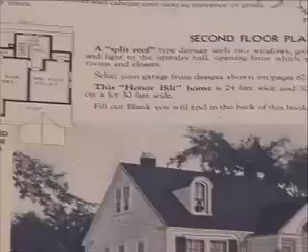I've been a freelance writer for several years, and I was asked to write about the Sears homes in Carlinville, Illinois. Carlinville has 156 Sears homes in a 12-block area. I went out there to research and write this one article, and I fell in love with the houses. They were so cute, they were well made, they were still standing after so many years.

They were built in 1919. From that point, I decided I wanted to learn more about the topic, and I went looking for a book on Sears homes. I found that there was no book on Sears homes, so I decided perhaps it was time to write a book.

Between 1908 and 1940, Sears offered kit homes in their general merchandise catalogs, and the houses ranged in price from $500 to $5,000. It was a complete kit—it came with 30,000 pieces of house, together with a 75-page instruction book.

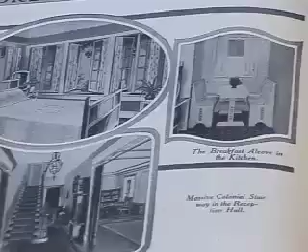Sears started selling these kit homes in 1908, but they didn't really take off until World War I. After the war and the soldiers came back, there was a tremendous housing shortage. In fact, housing analysts estimated 1 to 2 million housing units were needed immediately. That's when the sale of kit homes really skyrocketed, so it's pretty unusual to find a Sears kit home from before World War I.

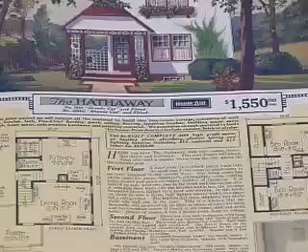One of Sears' ads, on the back of their 1918 Sears Modern Homes catalog, said, "Hang your saw on a nail all day." The average builder back then—the average do-it-yourself homeowner—would have been using a handsaw. He would not have had the power tools we have today.

So the fact that the lumber came pre-cut was a really impressive part of the deal and saved a lot in labor and time. Sears had their own staff of architects who would sit around and sketch out designs and draw plans for their kit homes.

They looked at what was popular back in the day—the popular housing designs of that era—and they'd tell the architects, build us a few of these. So yes, it was all male architects.

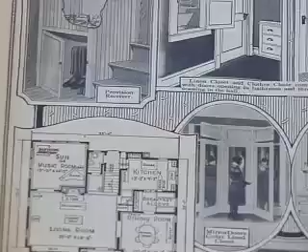That's the reason Sears got into selling kit homes—it was a way to sell more of the stuff in his 100,000 item, 1,200 page, 4-pound catalog. And it was very successful.

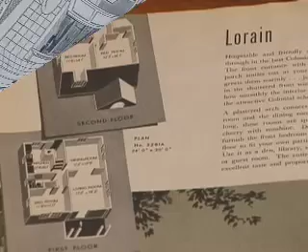Next, a design consultant with an extensive knowledge of this period in history talked about a design style that will bring 1935 into today. Back in the 20s and 30s, a lot of times you walked right into a room, especially a Sears Craftsman style room.

These homes were meant for very cozy, practical living, and that's why the rooms are small. If we had furniture in here, we would feel so comfortable because we don't have to shout to each other—right away, a conversation will be started.

So this color has to—these rooms really should be almost treated the same, so that it doesn't look like an afterthought. You have to make sure when you do it, it doesn't look like you ran out of paint, that every wall was done and then, oh, we forgot—so make sure that color somehow gets put in here. Paper like this, or a faux finish, would be wonderful inside.

A lot of times you'll see Frank Lloyd Wright's influence on these homes—the geometrics. They thought it was modern, but it was modern because of the amenities. What we call modern today is two different moderns, contemporary modern. Today we would call this very traditional. And tradition just doesn't go out of style.

After you picked out the house you liked out of the Sears Modern Homes catalog, you would send a $1 good faith deposit to Sears Roebuck, and by return mail they would ship you an entire set of blueprints and the list of building materials to come with your Sears home. You took a look at the blueprints, and if you liked them and the inventory promised, you would send in the balance of your money. Sears would credit that $1 deposit toward your final purchase price, and Sears would ship you, typically by rail, an entire kit house.

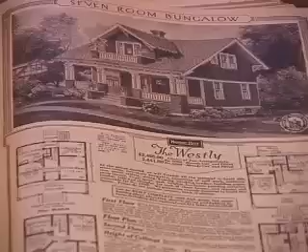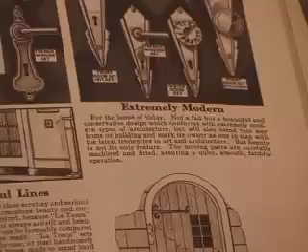The kit would fill about one boxcar. Sometimes the bigger homes required two boxcars. It was packed in an amazing manner—I've seen a photo of one of these boxcars, and I don't think there was room left over for a single nail. The kit included about 750 pounds of nails, 27 gallons of paint and varnish, 10 pounds of wood putty, 460 pounds of window weights, 72 coat hooks, and a doorbell, in addition to a lot of lumber and other parts.

But it was a complete kit—it had everything you needed to build a home. Then you would get a call from the station agent that your boxcar filled with Sears house parts had arrived. You would go down to the train station and they would put your boxcar on a siding. Typically you had 24, maybe 48 hours to unload the boxcar before incurring a penalty. And because the mode of transportation back then was a horse and wagon, or maybe a Model T or a simple truck, people often made many trips back and forth from the boxcar to their building site.

That's why today most Sears homes will be found within 1 to 2 miles of old train tracks, because you typically would make 10, 20, even 30 trips back and forth from the boxcar to your site.

The boxcar would arrive with a seal on it. Once you broke that seal, it was your responsibility to do an inventory of the pieces and parts. If you did find a broken or defective part among your 30,000 pieces of house, you simply contacted Sears and they would send you a new part. You didn't have to return the part or supply any evidence that it truly was damaged—they were very good about that.

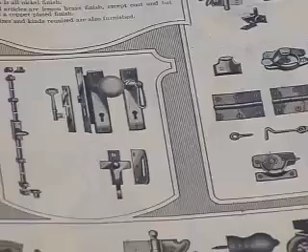What's even more amazing is that of the many people I've interviewed who actually built a Sears kit home, very few ever found a missing part. Can you imagine inventorying 30,000 pieces of house and not missing anything? Or shipping it 1,000 miles or more and not having anything break?

You'll never find a straight ceiling on the top floor unless it's an addition. The purpose is to restore this house to its original condition in order to keep its historical value, not change the structure.

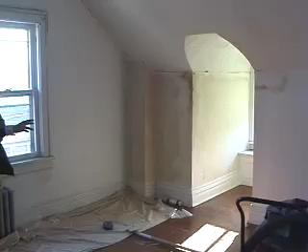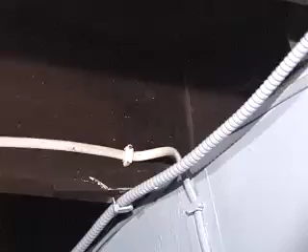Probably one of the easier ways to find out if you have a Sears home is to go into the basement or crawl space and look at the floor joists. There's going to be a stamp, typically A, B, C, or D, followed by a 3-digit number, such as C377. That stamp, together with the 75-page instruction book, told you how all those pieces and parts went together. Many years later, that's a wonderful way of authenticating that you do indeed have a Sears kit home—it will have a letter and a 3-digit number.

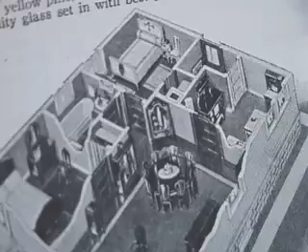Sears offered 370 different designs of their kit homes. Some people have this notion that a Sears kit home has a particular look, but they were patterned after the popular houses of the day. So you can't just look at a house and say it's a Sears home because it's boxy and simple, since they look like all the popular houses of that era. It's kind of difficult to identify a Sears home.

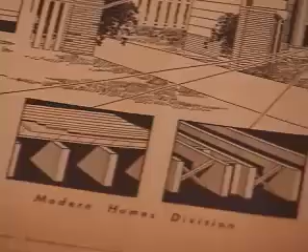Probably the best way is the stamp in the basement, looking for marked lumber. But not all Sears homes have marked lumber. About 1 out of 3 Sears homes won't have any marks. You'll find that stamp in two places: one is the butt end of the lumber, which you won't see in a completed house, and the other is 2 to 6 inches from the end, on the tall face. In other words, on a 2x6, it'll be on the 6-inch side.

The molding outlines in the room with the blocked corners, that's really not typical of a Sears home. I've not seen that in other Sears homes. It was just a little detail that would be very time-consuming to create, and kit homes were simple. Most kit homes had an essentially simple design because about 50% of the time, the home buyer himself would build the house on his nights and weekends. So the detailing in this room is not really typical of what I've seen in other Sears homes.

The archways could have been a matter of independent taste. If somebody retained a plasterer and asked him to design a specific archway, that wouldn't be difficult to do. The plaster was not included with the kit — you would contract for it privately or obtain it at your local hardware store, mainly because of the weight and regional differences in technique and temperature. So you can't really say, ah, it's a Sears archway.

Some of the woodwork, though, you can identify, specifically that block. Sears would put a block there so you wouldn't have compound angles where the different joints come together. If you just stick a wooden block there, you don't have to do a fancy miter cut. If you really look at it for a minute, it's completely out of place — the block is higher than the molding — but it was a way to solve the problem of a homeowner putting together their own kit home with no carpenter experience.

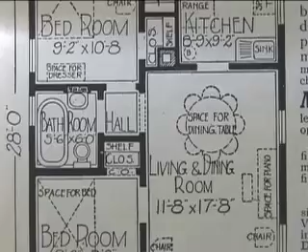At a lecture I gave in Champaign, Illinois, a woman in her 90s came to one of my lectures in a wheelchair, and clutched in her arm she had the original blueprints from the house she and her husband had built in 1929. She was holding those blueprints like one would cradle a precious child, and very carefully she unfolded them and showed me with great pride this house.

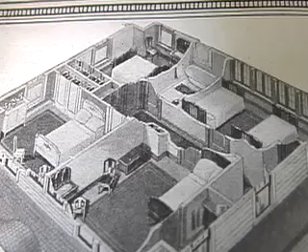In her family, she had made the decision, showed it to her husband, and said, 'This is the house I want to build.' I think that was probably fairly reflective of the era—the home buying decision was in large part left to the wife, but the husband perhaps had the ultimate say.

One of my favorite parts of that story is she also brought the original catalog where she and her husband had selected the house, out of this decades-old catalog. Where the price was supposed to be, there was a hole. She said, 'We didn't want anyone to know what we paid for our home, so we tore the price out of the catalog so nobody would see it.'

People would hang on to that stuff and stow it in the knee walls. I met a woman in Alton, Illinois who found the blueprints way in the eaves of her Sears home—that was a surprise. That was actually a 1910, 1912 Sears home, one of those rare ones I mentioned. She found a complete set of blueprints rolled up in the attic corner, where nobody had been for decades and decades. That's why I think you have a shot at finding something wonderful.

Yeah, I feel nothing, hear nothing, suggesting there was ever a door here. But this is an ideal spot for a door because you won't see it coming in, and you'll be able to access back there.

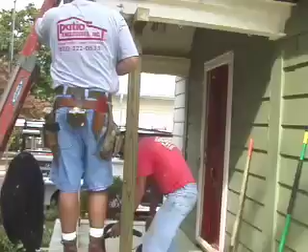Everything is now supported better. Everything that was here was rotted—all the posts were rotted, we had to change all our posts. So now it's not only functional but structurally sound. Before it wasn't. Sometimes it may, on the surface, look like it's still okay, but in the longer run there's really some serious damage, to the point where it could even fall down.

The porch that was here really made the house look old. Now you look at it, you see the porch, and then you see the house, because it opens it up. It's just a much cleaner look.

The last part of my book has a chapter, 'What Did George Bailey and Sears Roebuck Have in Common?' George Bailey is a reference to It's a Wonderful Life, one of my favorite movies. The movie is really about the stability of home. George asks how his life was important, and he learns he enabled people through Bailey Brothers Building and Loan to get into a home of their own, out of decrepit little shacks.

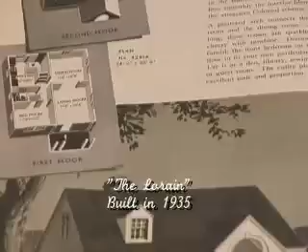If your roof leaks, you could damage everything in your home. It can lead to mildew and rot, and once you get mildew, it can be a very severe problem.

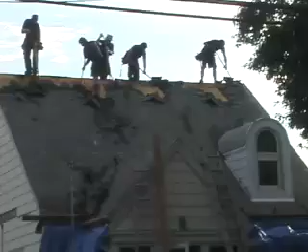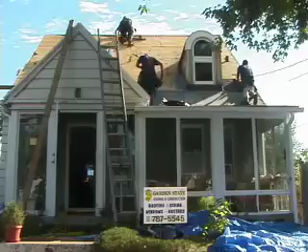The most common thing wrong with an old roof is there's usually too many layers on it, which is why we're removing the old layers on this house. We take everything off and inspect for rotten wood. After installing the ice and water shield and the vapor barrier, we install the shingles. If there are any valleys, we install ice and water shield into the valleys too, and we also install a ridge vent at the very top of the roof.

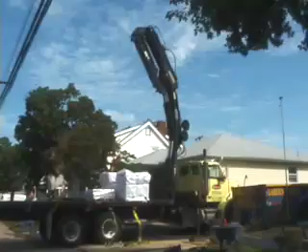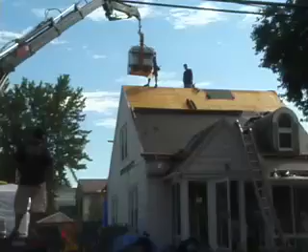It's very important to have ventilation so the roof can breathe. If it's not properly vented, it can sweat. If the inside temperature, especially in wintertime, meets the outside temperature where hot and cold meet at your roof area, it will sweat. Sweating can cause mildew in the roof, which leads to health concerns.

Years ago, they used a lot of wood shakes, which actually had holes right through the shingles—you could be in the attic and look out and see the stars. But as soon as it started to rain, the wood shakes would tighten up and actually vent themselves. As time went on, they switched to asphalt shingles, and roofs became tighter and tighter, to a point where it's a very tight seal, and when it can't breathe, it will sweat. That's why they had to start venting.

Your roof is the most valuable thing you have in your home, and a lot of people don't think of it that way, but the roof over your head protects your entire house.

Another fascinating part of the Sears home history is how many immigrants, men and women of color, and single women were able to buy a Sears home after being denied home ownership because redlining was the rule of the day back in the 1910s, 20s, and even into the early 30s. Sears offered mortgages on these houses with very generous terms, 75% mortgages.

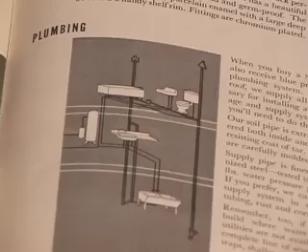If you owned your own lot, that counted as a down payment—in other words, full financing on these kit homes. To qualify for a Sears mortgage, there was only one question you had to answer: what is your vocation? If you had a job, you got a mortgage.

I love that. As you read the testimonials from these people who bought these houses, many have names that are very difficult to pronounce, and you wonder how many immigrants fresh to this country, who would have been redlined by the traditional lenders of the day, were able to not only get a home but to secure financing.

One of the sad things is that a competing kit home company of that era also offered easy financing on their kit homes, but they had an extra line on their mortgage application that asked, 'What is your race?' For what possible good reason could that be asked? I think Sears was incredibly progressive and did an incredible, unspeakable amount of good in offering the great brass ring of home ownership to people who were new to this country.

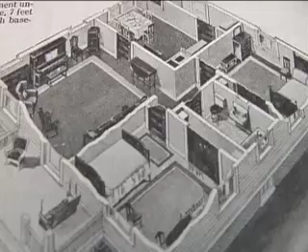One of my favorite stories came from a man who read my book and wrote me a letter telling me that he had built his own Sears kit home in 1940. He had gone to this store in Chicago and talked with one of the salesmen at the Sears Modern Home Sales Center. He said, I really like the Hammond, which was one of their smaller homes, but the kitchen's 8 by 10 and I'd really like a bigger kitchen.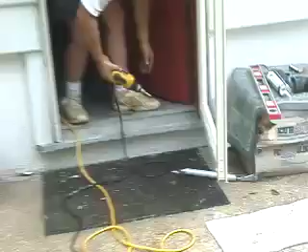He asked if he could get the kitchen enlarged to 8 by 12, and the salesman said, why don't we add 2 feet to the whole back of the house? The house was about 35 feet wide, so imagine, this was going to add about 70 square feet to the house. It would change the pitch of the back roof, require a lot of extra building materials, and they'd have to redraw the blueprints and completely change the quantity of building materials for these extra 2 feet across the back 35 feet of the house.

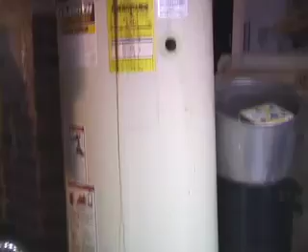The man said, well, that sounds pretty interesting, but how much is that going to cost me? The salesman went into a back room and said, let me do the math. He came back after a bit, and the man who shared this story said he was so nervous, wondering how much all this extra was going to cost and thinking about the work involved in altering a blueprint like this. Finally the salesman returned and said, okay, I've done all the math. 2 feet extra across the back of your 35-foot wide house is going to cost you an extra 67 bucks. So he went with the extra 2 feet.

And you could get your Sears house customized. Probably about 1 out of 3 Sears homes were customized when built.

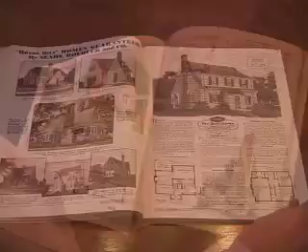Another great story came from a man I met in Wood River, Illinois. His mother had found a Sears home that she just loved, but she found a second Sears home she loved also. In fact, she liked the bottom half of one house and the top half, or the roof lines, of another house. She literally cut up a Sears Modern Homes catalog, pasted this creation together, sent this cut-up, pasted version of a catalog page into Sears Roebuck and said, can you ship me this house? And they wrote back and said, sure. So there's a Sears house out there somewhere in southwestern Illinois that is 2 houses put together.

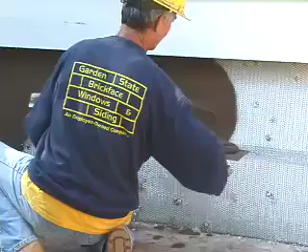It's an old world technique that was honed down to a craft by the original owners of the company. Brick face, stucco and stone face. The type of stone we do is very specialized, detailed work that's done by our craftsmen who are trained in our university. So it is very detailed work that takes a lot to learn and takes someone who really knows what they're doing to do.

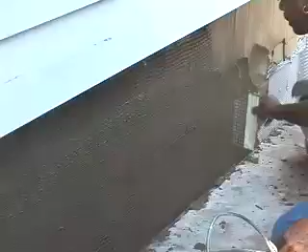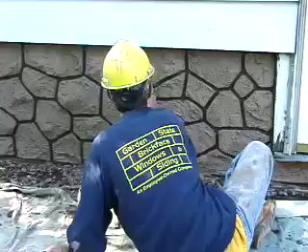What I really wanted to do was update the house, but still try and maintain some character. Just looking at the style of the house and what everyone else had made me decide, let's do a little random cut stone here, because I don't see a lot of that. It's a little showy, and it's going to definitely give her some curb appeal again.

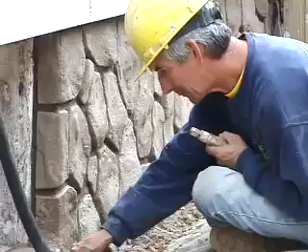You can find a place for a little bit of stone or a little bit of brick anywhere if you just look hard enough.

Now, a customer today wants that special touch. They want their house to stand out from every other house in the neighborhood. You originally had on the house a 7-inch clapboard, which was large all the way around. It kind of made the house look a little bit smaller than it is. What we chose for you in the structure was a 5-inch panel, which makes the house appear bigger.

Taking into consideration the style of the home, the color of the roof, as well as the surroundings, we wanted to do something neutral and somewhat safe, but a little different, and that's what made us choose this color.

If you're doing shingles or half rounds, they're really not made to go everywhere on a home. They're more of an accent piece, so you want to pick certain places on the home to accent and make stand out. If you ever want to dress up a house just a little bit and you're not quite sure what to do, do a window header, put a mantle somewhere, and what a difference it makes.

So you can actually get crown molding that looks just like wood, but it's actually vinyl, 100% virgin vinyl. Anytime you do vinyl on your home, you want to make sure you do something like that, because that'll last you a good 30 years versus a contractor grade or recycled vinyl.

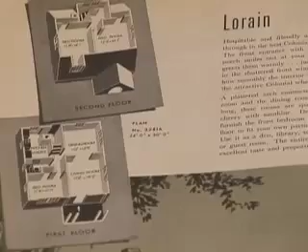So Lorain was a fairly popular house for Sears. It was only offered in the 30s, and typically the houses that Sears offered in that decade you don't see very many of, because housing sales had gone down so much. Some of them have the rounded dormer, such as in this house, and some have a gabled dormer, but the round dormer is certainly very distinctive. It had lots of windows and a very cute little covered entry.

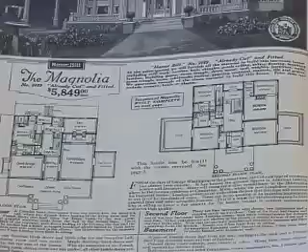In fact, in the 1908 General Merchandise Catalog, there was an ad that said, 'Let us be your architect without cost to you.' Interested customers were invited to write in and request a specialty catalog, a book of modern homes and building plans. It was a complete kit, coming with 30,000 pieces of house together with a 75-page instruction book. Sears promised that a man of average abilities could build one of these homes in about 90 days.

Very ambitious. In meeting some of the people who actually built these Sears kit homes, I learned that often it took many months, because people bought a kit home to save money and would build the houses on nights and weekends, which extended the time out a bit. I met one person who took about 10 years to build their Sears kit house, and someone else who did it in 6 months of nights and weekends. So the time varied quite a bit.

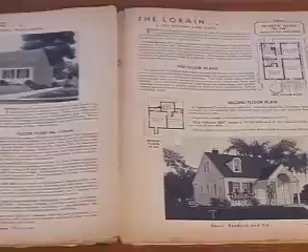The landscaping was up to each homeowner, however the Sears and Roebuck catalog drew in landscaping suggestions for each home. The original owners who built the Lorain here in New Jersey followed that layout, and after 70 years, the retaining wall was ready to go. The concrete in the driveway was also needing replacement.

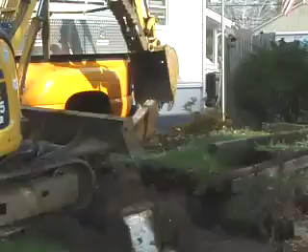The ideal was to find one company to do the retaining wall, the driveway, the walkway, and the landscaping, and to have the new design stay close to the original design to keep the historical value. It was a challenge that Darren Davis of Celtic Concepts had no trouble meeting.

I've always had a good sense of feel for a property. Darren presented a solid plan we could see first. We want the pavers to neutralize against the house, which is a neutral colour itself with the beige siding. Then our flat material will bring out the character and the cornering of the front of the house and the porch. And we put in the hydrangeas and the crepe myrtles to give it colour for the summertime.

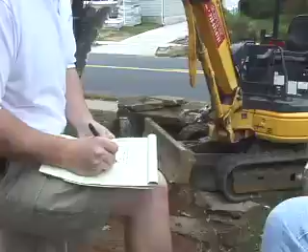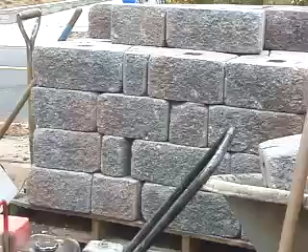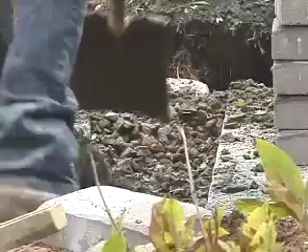In most cases, walls only fail because they have no drainage system to pull the water out from behind them. So what we do is put in a 4-inch perforated pipe behind the wall, install 3/4-inch clean stone around the pipe, and then backfill it. Water at the higher elevation hits the wall, drains down through the stone into the pipe, and drains out through a hole at the side of the wall, which stops any hydraulic action from pushing the wall out.

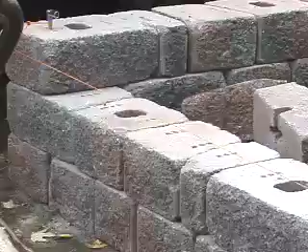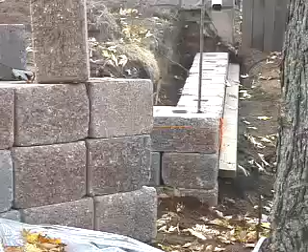A Country Manor retaining wall is a very good choice for older homes, it has that old antique look to it. The retaining wall materials were selected also for the antique finish, as our expert on anchor products from Belgard explains: any product that's antiqued is made new and fresh, then we let it cure for about 14 days, and run it through an antiquing machine which takes off some of the sharp edges, giving it a more rustic, old world, used look instead of so fresh and new, which can sometimes be sharp on the eyes. I like Country Manor wallstone because it's very simple, very elegant. When you put a limestone cap on it, it gives it a nice appeal.

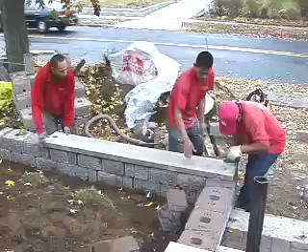It doesn't take away from the house. It obviously blends with the color of the house so that it doesn't stand out on its own. Limestone is the material used to cap the retaining walls. I find that using the limestone gives a far more elegant look, a nice finish, and it blends in very nicely with the stairs.

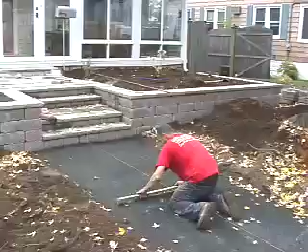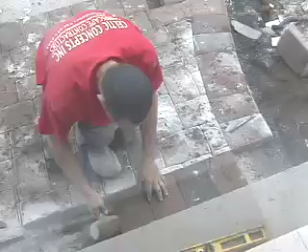Instead of replacing the concrete on the walkway, pavers were chosen for a few reasons. We have a lot of issues here with freezing and thawing. With very hot summers and very cold winters, you'll find that concrete has a tendency of cracking. The beautiful thing about pavers is it's very elegant when installed correctly. It gives you a nice clean flat surface. It brings up the property value considerably, and it can be reinstalled.

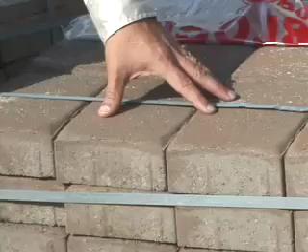This particular product that you've chosen for the sidewalk and the patio is called our London Cobble series. If you look at it, it has a very distinct finish to the edge of the paver, and this particular product has our Anchor Guard finish on it, which removes any of the coarse aggregate from the surface of the paving stone and gives you a better and longer lasting wearing surface. It looks very nice in historic type applications, sort of an old world, more natural, not as sharp-edged paving stone. One of the best things about Anchor products is their surface doesn't deteriorate, so you get value for money.

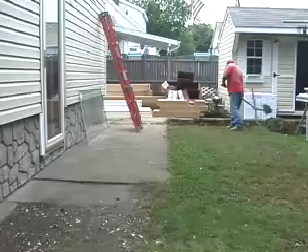Usually with clay brick you're stuck with the reds and orange colors. With concrete paving stones you can get into browns and grays, you can do the reds, different sizes, different finishes. This happens to be part of our Anchor Guard series.

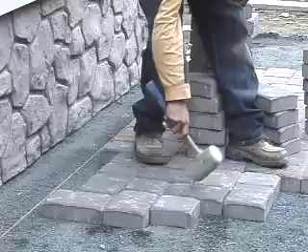Maintenance for this product is pretty simple. After the job is done and it's swept with sand, you basically just have to keep it clean from debris. You don't want to let leaves collect and clutter on there, because eventually they'll break down and you'll get organic matter that collects in the nooks and crannies. You simply power wash out the joints every 2 to 3 years to keep the pavers clean, and then fill it with polymeric sand, which is a concrete-based sand. Fill all the gaps up. As soon as the rain hits it, it hardens up in the joints, and you don't have to worry about it for anywhere up to 2 to 3 years.

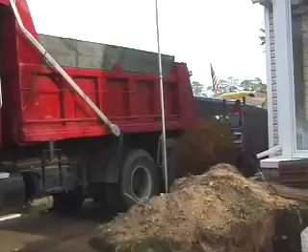The concrete in the driveway was also needing replacement. Well, I prefer asphalt to concrete anyway. Asphalt is far more resilient to salt erosion. Asphalt is a lot less expensive. It usually holds up for anywhere from 8 to 10 to 12 years, and sometimes even longer if seal coated properly. It's also very neutral. It doesn't take away, again, from the appearance of the house.

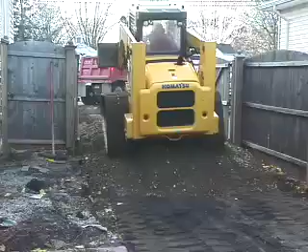Whereas if you were to take this house, put pavers in front of it, which is natural, put the retaining walls and the limestone caps that we've used, which is natural, and then put a white concrete going all the way up, it would just look like a landing pad, which is not what we want to create. We want it to blend in, we want the blacktop to blend in, and we want the pavers and all that to neutralize against the house, which is a neutral color in itself.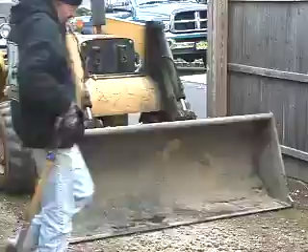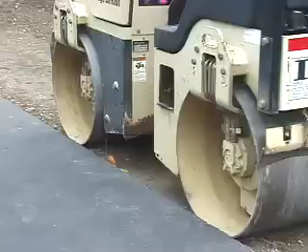We grade the driveway so water would have proper flow, and it drains right out to the street. Asphalt is actually oil - that's what makes it black. A good driveway should last anywhere from 15 to 20 years before you should do it over again.

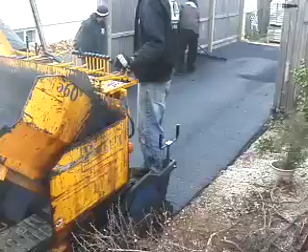It all depends on the condition of it. Some can be overlaid and some have to be torn out and done over. You seal coat it next spring, you seal coat the following, and then you don't have to touch it again for 5 years, and repeat the same process. That's the proper way to do it.

You would want the sealer to wear off, okay? Because so many applications, a lot of people do it every year, and then what happens is it gets so many layers of sealer on it. It starts cracking and chipping, just like when you paint so many times over and over. It starts flaking. What happens is you think the driveway's bad, but it's not - it's the sealer.

I don't think the younger generation knows much about that - that years ago, you could buy a home through the Sears and Roebuck catalog.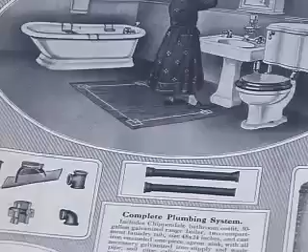I think my favorite part about Sears homes is it's just such an amalgamation of American history intertwined with the history of immigrants coming to the country with fresh hopes, intertwined with the history of architecture, with merchandising history. It's just really the convergence of so many fascinating, uniquely American elements of our history. And it's a wonderful time in our history.

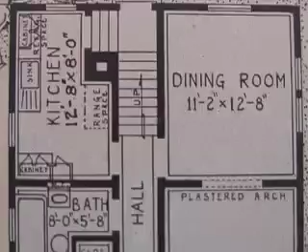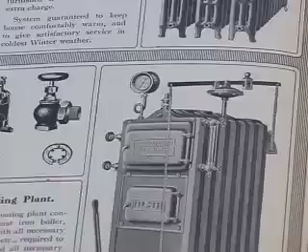The Little House on the Prairie books, Laura Ingalls Wilder talks about life on the prairie in the 1870s and 1880s. She talks about living in a soddy, which was a house made of dirt bricks. She talks about grass growing on the roof. When it rained, mud would leak into her house. She talks about life in a very primitive cabin where it was so cold she'd wake up and find frost on her comforter.

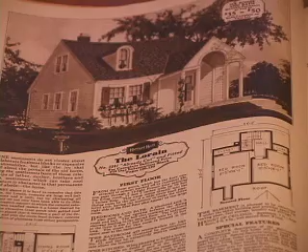To go from that in the 1870s and 1880s to a home with a central heating system, indoor plumbing, electricity in 1908 - that's a fantastically fast evolution of housing in the span of three decades, less than a lifetime. So I find that fascinating. In fact, as late as 1917, American Carpenter and Builder was suggesting that a house with weather-tight walls was a plus. That was 1917. So American housing went through this fascinating and very rapid evolution at that time.

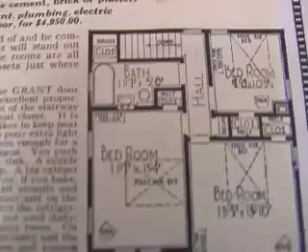And that's another favorite element, is just watching the growth of how we all expect to have primitive housing or basic housing. And what we consider primitive basic housing today would have been a luxury mansion in the early 1900s. So I guess my favorite elements are just all the uniquely American aspects of somebody picking up 30,000 pieces of house at the depot and turning it into a home of their own.

And then it was a home. So many of these elderly people have come to my lectures, and they still get a tear in their eye as they talk about building the house, or watching Dad build the house, or how Dad made a game of reading off a part number on the blueprint and sent the kids scampering to find the piece of lumber that was marked A117. People put their hearts and souls into these houses, and they still love them, and yet so few people have even heard of Sears kit homes today.

And they're at imminent risk of destruction. As I mentioned, in some of the higher priced communities, these houses are being torn down at an alarming rate. So I guess it's the preservationist in me. They are simple houses. They're the working man's houses, the middle class houses, the immigrants' houses. They need to be preserved and protected. So it's, I guess, a part of the underdog in me loves it's hidden treasure.

That's another element. Finding these houses and knocking on the door and talking to the homeowner and saying, did you know this house came out of a kit? It came out of the Sears Roebuck catalog. It came in all these pieces and somebody put it together with a 75-page instruction book. And invariably, these people write me back two weeks or two months later to say, I can't stop learning about this. This is fascinating. You've opened my eyes. You've changed the way I think about this house.